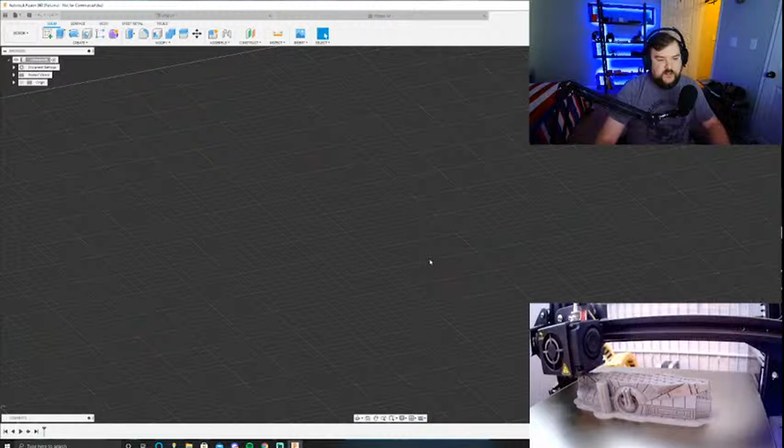And this is Fusion 360, by the way, if anyone is interested. Fusion 360 is professional CAD software. You can get it for hobby design for free, it's called a hobbyist license. You can look it up, just type in Fusion 360 for hobbyists. You'll have to follow some links to get it unlocked for free, but as long as you're not making real money off of it, they won't charge you anything to use the software. They do have more specifics in the contract when you get the software, I can't remember exactly, but it was something like if you make more than $2,000 or so in a year, they consider you a professional and you'd have to pay for the licenses. And they're not cheap, but it's pretty dope that they allow hobbyists to actually use it.

So yeah, basically with any CAD software, you're going to start with a sketch. So right here, we're going to click sketch, and we're going to pick a plane that we want to sketch onto. I'm just going to pick this plane right here.

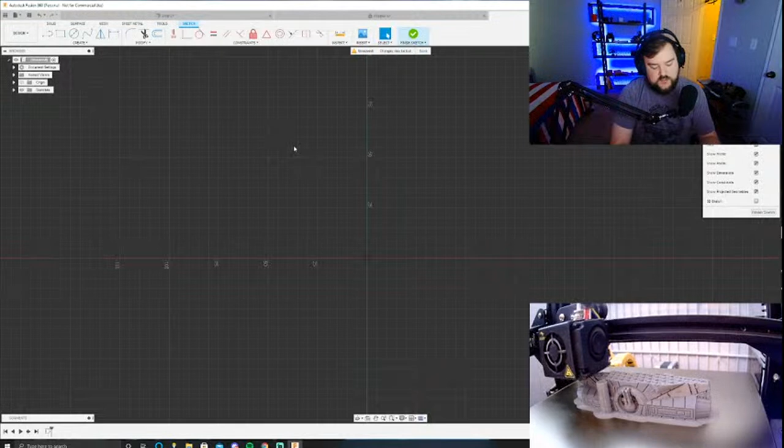So the idea I had to redo this is to get rid of one of these sides entirely and just have a piece that comes out that this flipper can snap into. Then we'll redesign the flipper to make it a little bit weightier in the front, and add a stop somewhere up here so the flipper can't go all the way up, so the weight will force it to drop back down.

So let's just start with a circle down at the bottom here, because we're going to make a peg. The other thing, just to mention, all the dimensions I'm going to be using are going to be in millimeters.

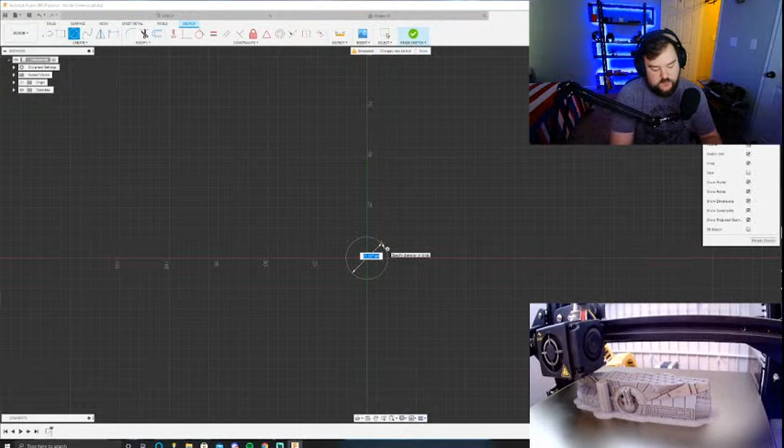STL files are natively in millimeters. So when I go to slice this or put it into my slicer, we'll talk about that a bit later, it's going to default to millimeter settings, so that way I know all my dimensions are going to be right. So I'm going to grab my calipers and do some measurements on my original piece here.

We're not going to vary too far. It looks like it has a 30 millimeter diameter at the bottom, so we'll do 30. Then to make it easy, we'll do a line there and there. Just kind of go until it looks about right. We'll do 80 on that.

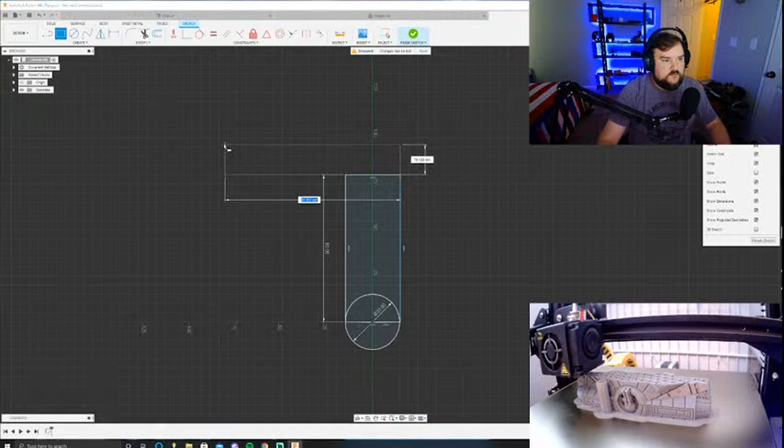All right, and then we need to build this little foot piece here. So I'll take another rectangle, push it out there. We'll do another 80 there and 15. Actually, let's make this guy smaller, and I'll show you why in a second. I'm going to make this guy taller, so 100.

Then we're going to take this tool right here. It's going to create a round right in the middle, and we can set that to whatever we want. 20, 20 is not bad. Let's see what 30 looks like. 30 is kind of a lot. Actually, let's go with 30. Then I'm going to increase this to 10. Too much. 8, that's looking pretty good.

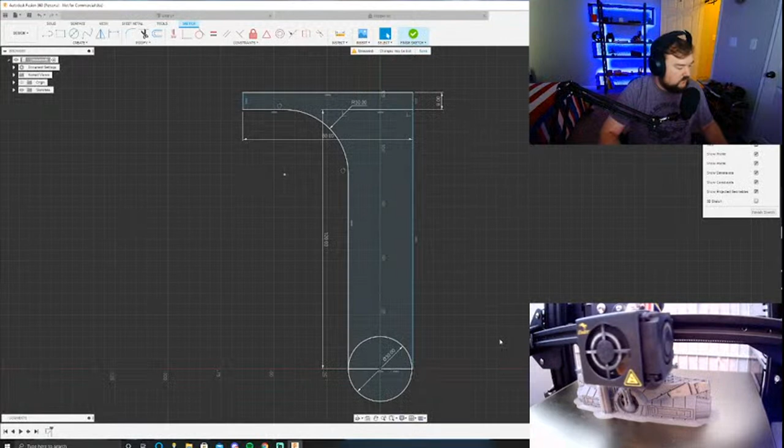And make it a little taller. Let's see how big I did on the original piece. Okay, 140 is what I did on the original piece. Do 130. That's looking pretty good.

Okay, so we're going to finish that sketch, and right now it's just two dimensional, so in order to make it three dimensional, also this looks a little funny. Sorry, I just want to make sure that there wasn't an issue. Sometimes the software will be off just by a little bit if you didn't line up your points, and there will be a gap, which will mess things up when you make this into a three-dimensional object. But it looks pretty good.

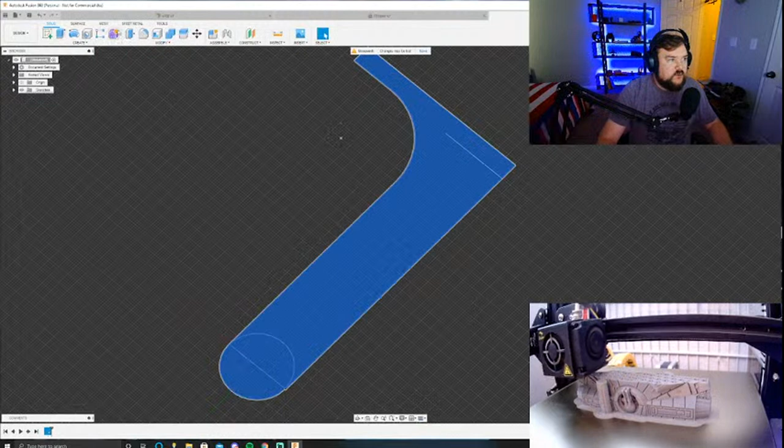So in order to make it a three-dimensional object, you have to use a tool called the extrusion tool. Well, it's called a press pull tool in here. You select the pieces you want to elongate, push, pull, extrude, whatever you want to call it. So I'm going to click this and change my angle a little bit. You can see this arrow, which you can either drag or, if you type in any number, it's going to move it that distance in millimeters in that direction. So 5 millimeters, and typically when I'm 3D printing, that's about as thin as I want to go for a functional piece.

Unless I have a specific reason to go thinner. Usually it makes a pretty decently strong piece at 5 millimeters. You probably could go a little bit less or a little bit more depending on what you like. So I'm just going to stick with 5 on that. There, that's not too bad.

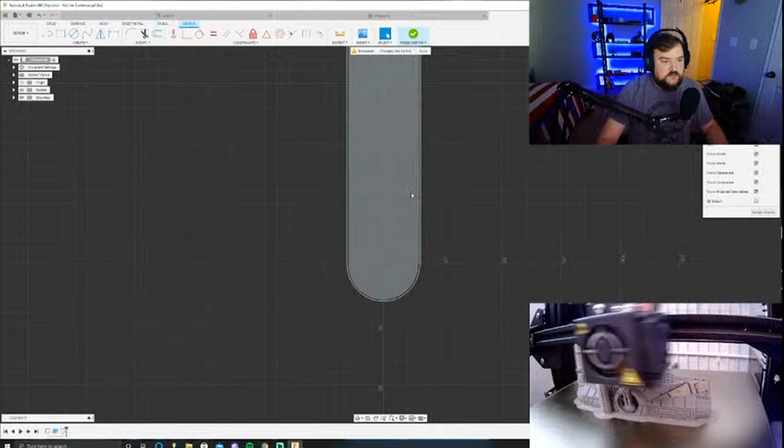And now I'm going to make that little peg. So I'm going to do another sketch, and to make it easier, okay, look, see, there's an issue there that I had. So let's actually go back and fix that. Delete this sketch because we don't need it. So if you see here, that was one of my issues.

We can, if you click D on the keyboard, select the dimensions you want. So if I change that to 30, yep, there we go. Now it's lined up correctly because it's a 30 diameter circle. All right, that's looking way better.

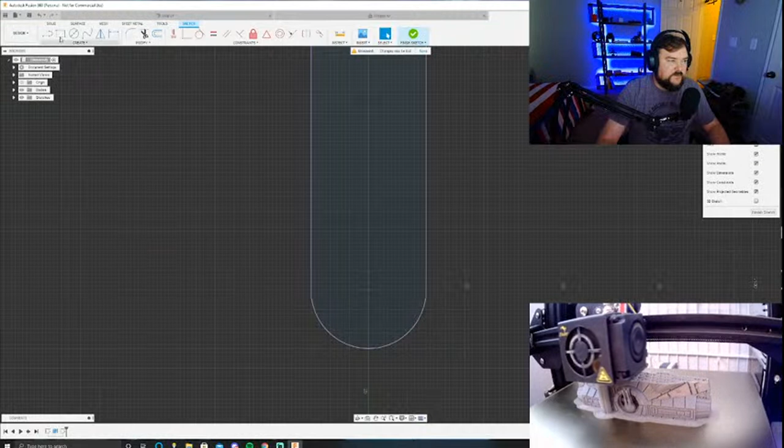Now we're going to go back to sketch. If you project, hit P on the keyboard, it's going to pop up this, and you can select any edges that you want to project. Once I click project, now I can lock my sketches onto any of these pieces here if I need to, or use them as a reference. So the main reason I did it is because I wanted this point as a reference here.

So we do a circle. Once again, oh great, I can't get into this piece, like I said it won't pop out. What I will do, let's just give it a number, 12. We can go to our original flipper and measure. So we did 16.4 diameter, I think I gave it the extra 0.4 just so it'd clear.

So I probably did a 16 millimeter peg, if you will. Let's do that again, 16.

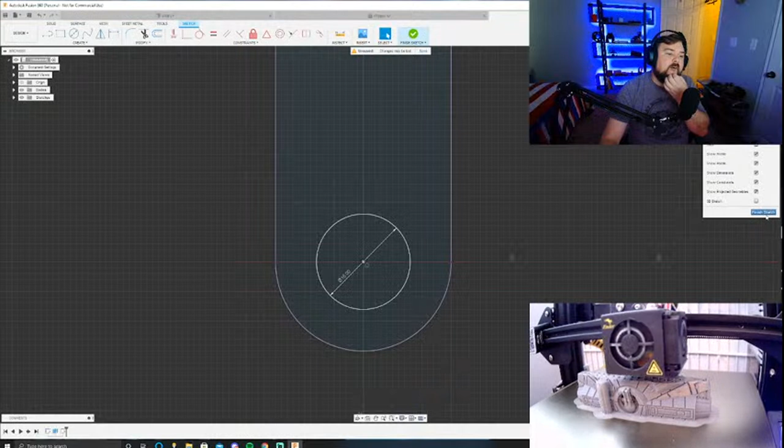Yeah, that'd be fine. We're gonna extrude that. And let's go with 20.

All right, now since we're not going to have a piece going this way to hold our flipper down, we're going to need a pegged end so that it'll snap in there. So I'm going to go with another sketch, project. Another circle, we're just gonna make it a little bit bigger. So we did 16, just do 17.

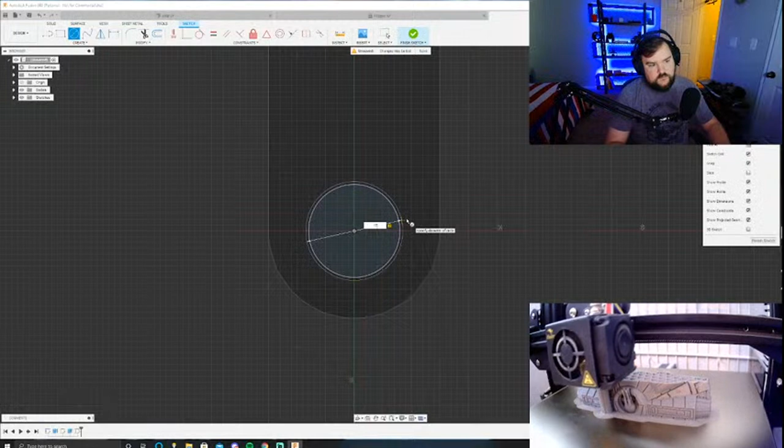And we're going to extrude that. Let's do 5. Cool.

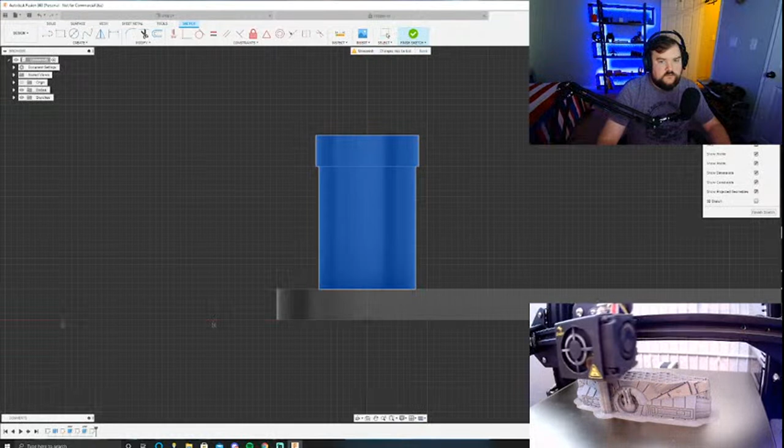All right, so what I'm doing right here, I'm gonna put a cut right down the middle so that when we put our flipper in, it'll have some flex and it'll allow it to snap in. So let's do another project, and those two objects there. We don't have to go all the way down.

So that line, I'm gonna redo. I'm doing a line here just as a reference.

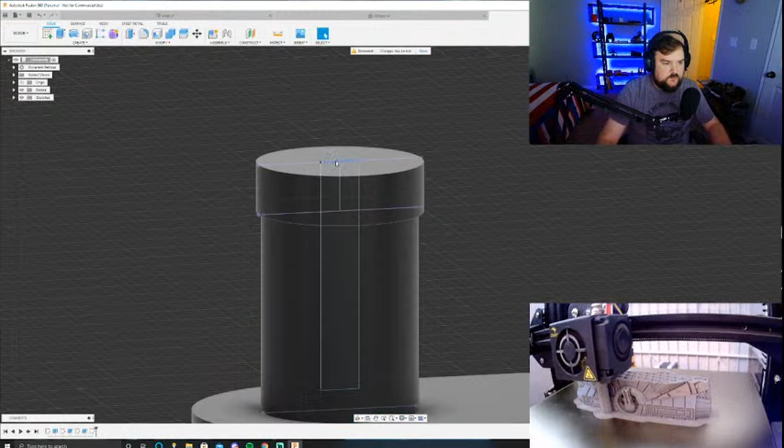Ooh boy, okay, we might need to go back. We want to cut, and we want 2 sides. There you go, now we have a cut in our piece there.

And let's go ahead and make this a little bit, we need an angle on it so that our flipper will be able to snap over it pretty easily. So we can either do, let's do a chamfer, let's give it...

That looks pretty good, actually we're gonna go. The reason for that is when this prints, this is going to be what's on the bottom, and when it prints, it's going to create layers, so layer lines, which might be a problem.

I'm just thinking, so it's going to be weakest all along, or perpendicular to the layer, so that's where it's most likely going to snap. We might have an issue — if these flex too much, it's going to want to snap these pegs. I think I'm going to risk it, because I don't think it's going to be that big of a problem for us, because it's not going to be flexing that much.

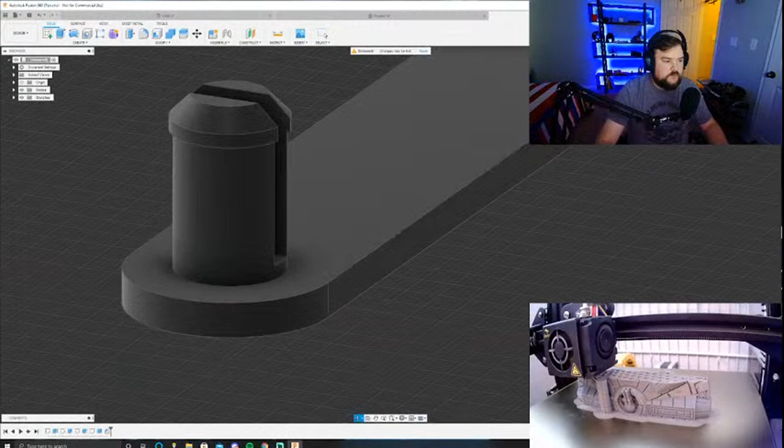Yeah, but anyway, so the other thing about the printing process is that it starts here and then it goes up. So when you have a sharp angle like this coming straight out, there's nothing below it for it to put the hot plastic on, so it's just going to melt off the edges. So one way to try to mitigate that is to create an angle.

So I'm going to select both of these and then do the same thing, a chamfer, we're going to do 1 millimeter. Uh-oh.

So now it's not as drastic of a drop off, and it'll probably overlap as it goes up. Anyway, it'll look a lot cleaner when we're done. That piece is done.

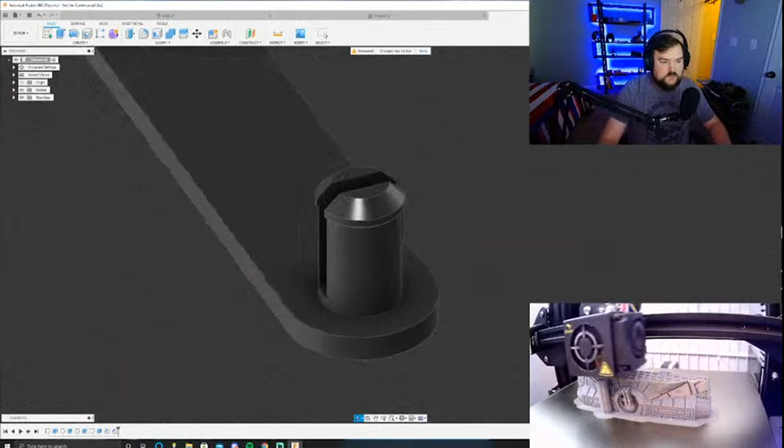All right, so now we're gonna need a way to attach this to the bottom of a shelf. So I'm gonna do a piece that's perpendicular, it comes up like that. Sketch, project, okay.

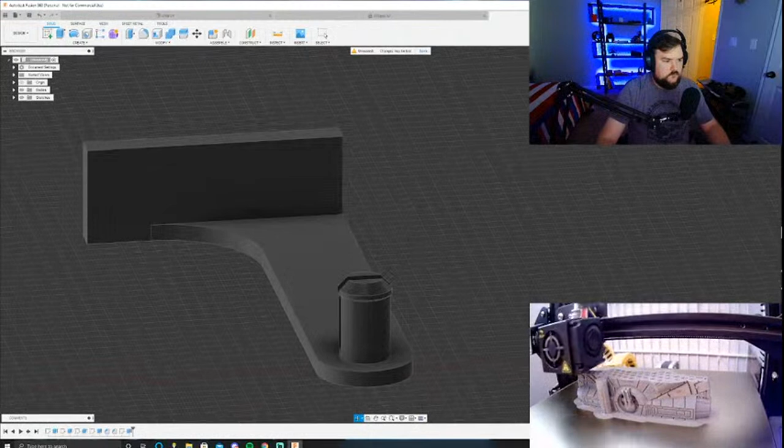Let me draw some holes in here so we can mount it to the ceiling, or not ceiling, but the shelf.

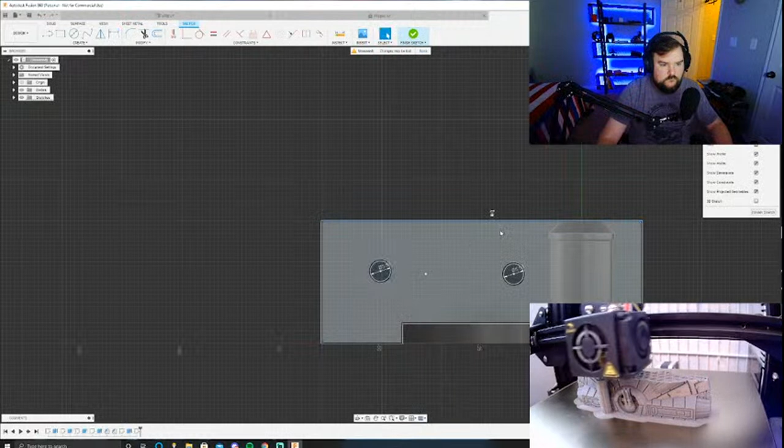We did 25, 12.5 should be half of that. Oh, but it's actually 30.